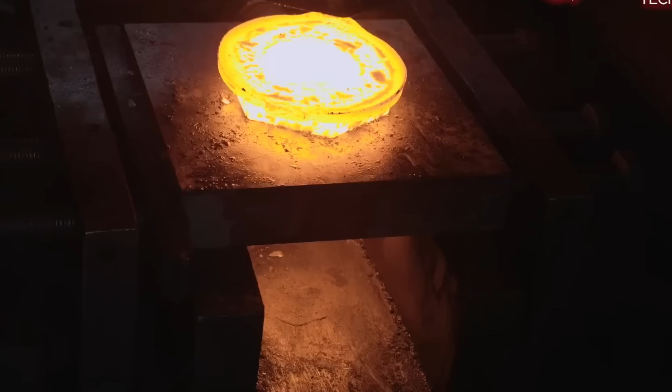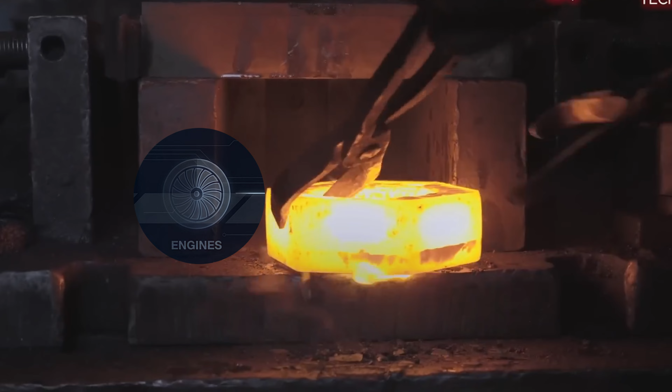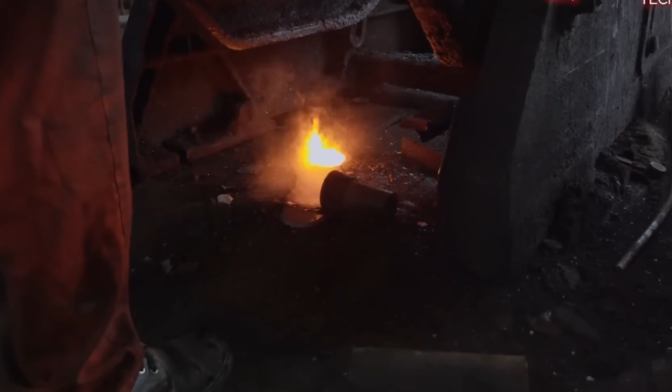Welcome to WarTech Lab. If everything fails, this is what's left. Not engines, not weapons, just steel. A single connection between a ship and the ocean beneath it. Because when a storm hits and control is lost, everything depends on one system that cannot break.

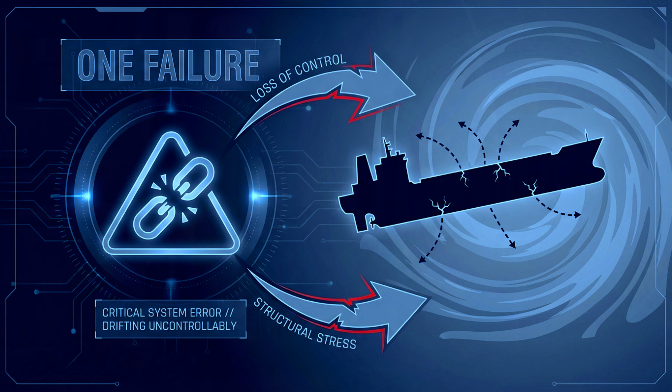These chains don't just hold ships in place. They hold billions of dollars in cargo. They hold entire vessels steady against the force of the sea. They hold lives. And if even one link fails, the consequences aren't gradual. They're immediate. Uncontrolled drift, structural damage, total loss. Because at this scale, failure doesn't give warnings.

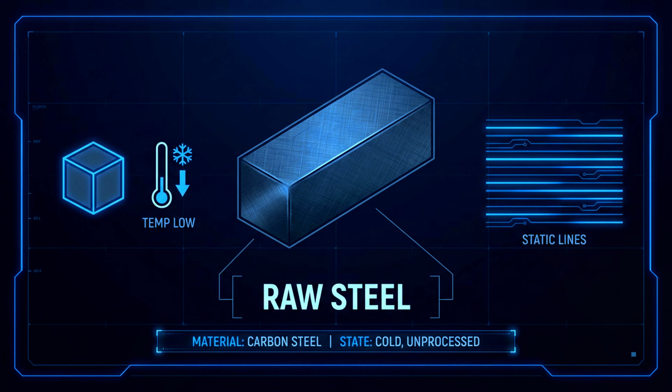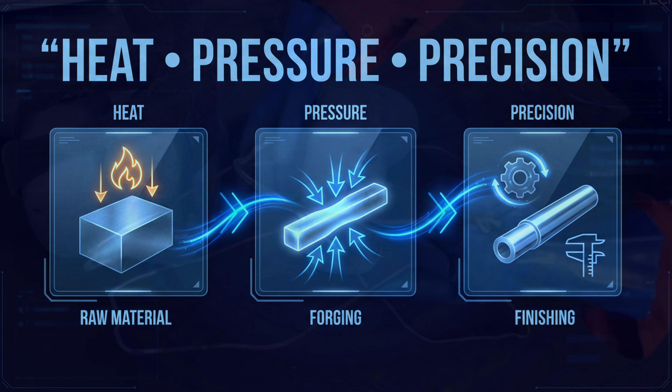But what you're looking at doesn't start as a chain. It begins as a solid steel bar, cold, rigid, and unremarkable, until it enters a process designed to push material to its absolute limits. Heat, pressure, precision. This is where raw steel is transformed into something that must never fail.

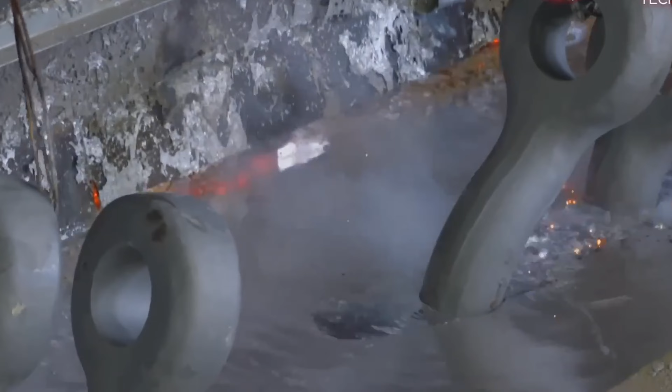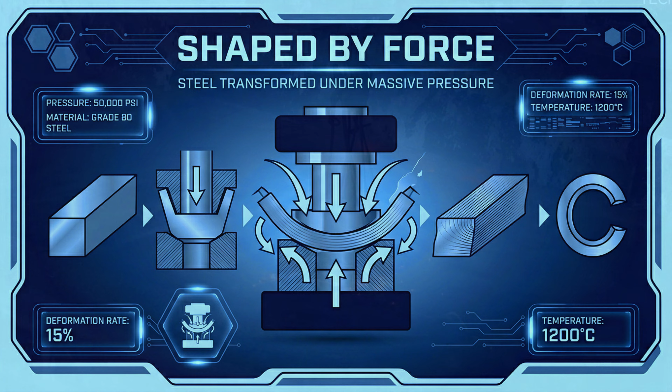Inside massive furnaces, each piece is heated from the core, reaching temperatures high enough to reshape the metal itself. It glows, softens, becomes something else. Then comes force. Hundreds of tons of pressure bend, compress, and form each piece into its first recognizable shape. Not yet a chain, but no longer just steel.

Because a chain isn't defined by its parts, it's defined by how they connect. Each link must be closed, fused into a single continuous structure, not attached, but transformed into one piece, at the molecular level. Because in the end, strength isn't about size. It's about whether that connection can survive when everything else cannot.

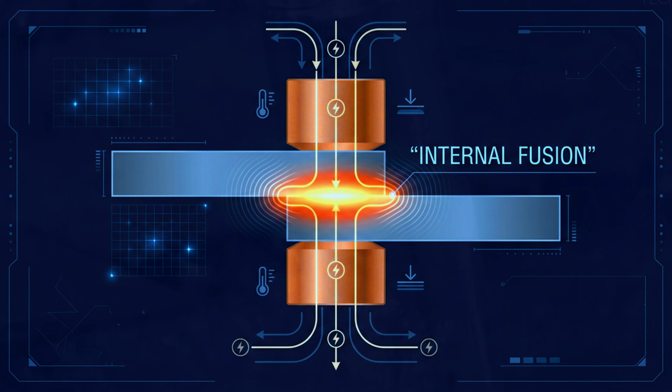At this stage, the link is closed, but it's not yet complete. Because closing the gap is not enough. It has to become one. An intense electric current flows through the joint, generating heat from resistance itself. The metal begins to melt, not from outside pressure, but from within. And in seconds, two separate ends become a single structure. No seam, no weakness, only continuity.

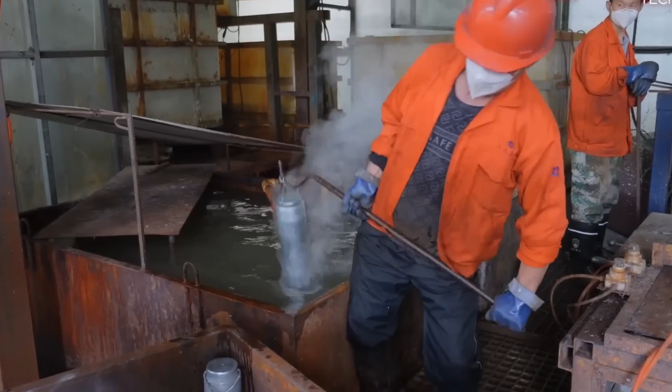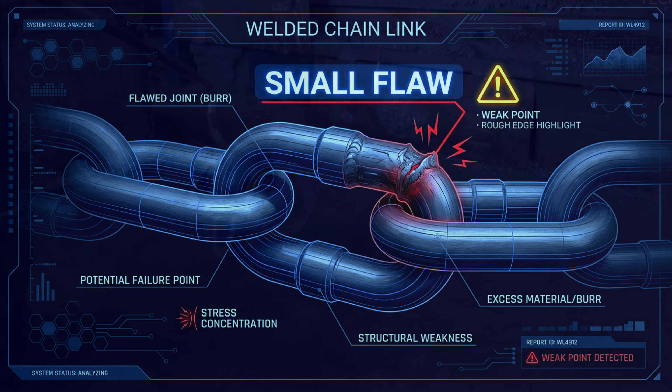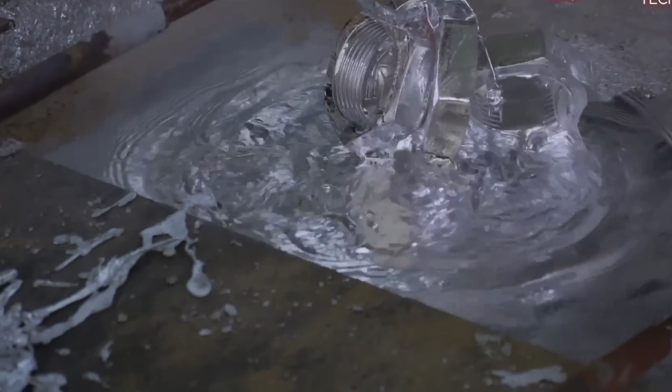But even perfection leaves behind flaws. Excess material forms at the joint, a small imperfection that cannot remain. Because at this scale, even the smallest irregularity can become a failure point. So the link is pressed again, with controlled force, removing everything that doesn't belong. What remains is clean, uniform, precise, ready for something far greater.

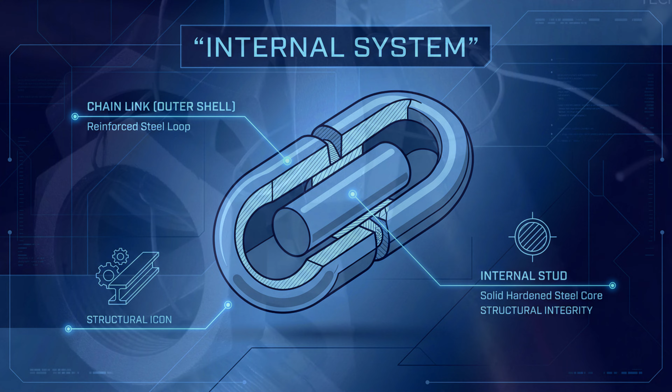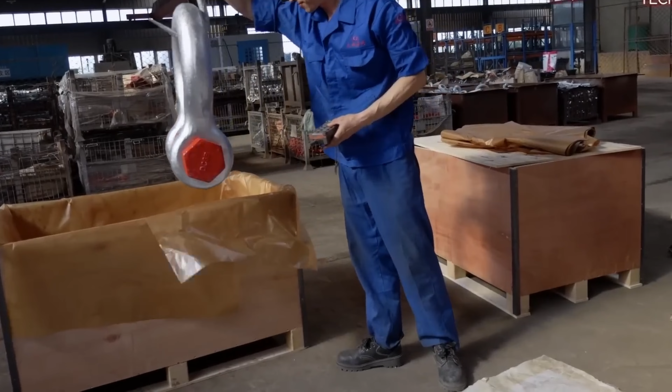But strength isn't just external. Inside every link, there's another system, a solid steel bar placed at the center. This is the stud. It prevents deformation, distributes force, multiplies resistance. Without it, the link could bend under pressure. With it, the entire structure becomes rigid, stronger, more stable, more reliable.

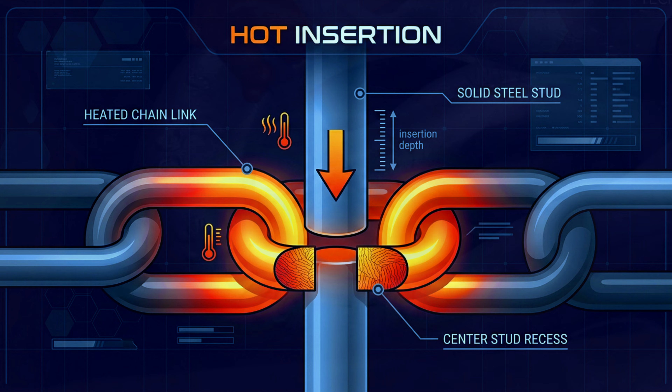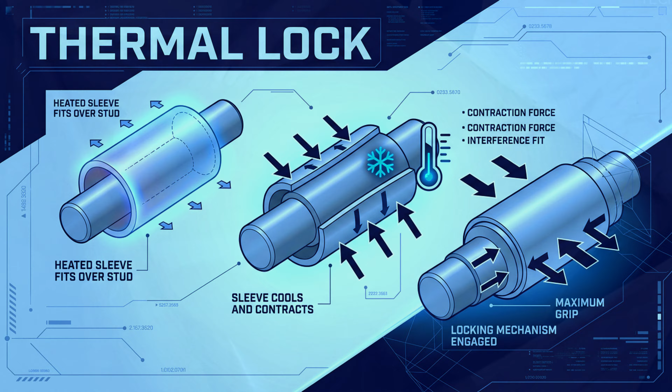Now comes a critical step. The stud is inserted into the still hot link, and then pressure is applied from both sides. As the metal cools, it contracts, trapping the internal core with thousands of tons of force. Not bolted, not fitted, locked in place by physics itself.

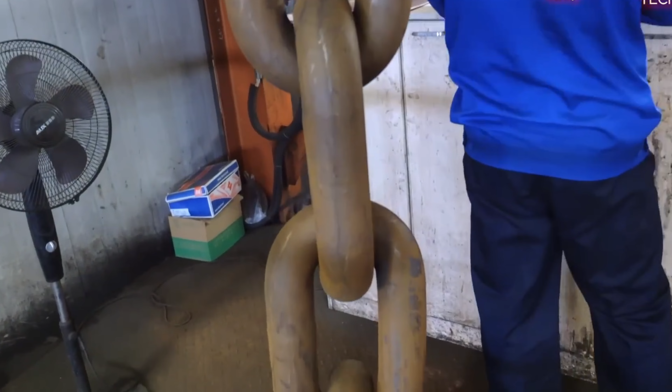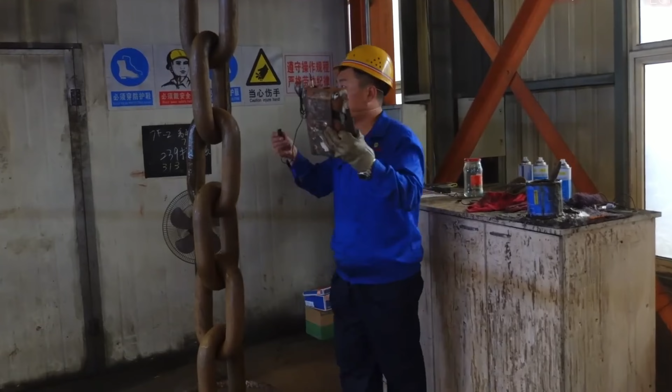But a chain alone is not enough. There has to be a connection to the anchor itself. This is where the shackle comes in, larger, stronger, built to withstand forces even greater than the chain it connects. Because this single component becomes the final link between engineered precision and the unpredictable force of the ocean. And if this fails, everything fails.

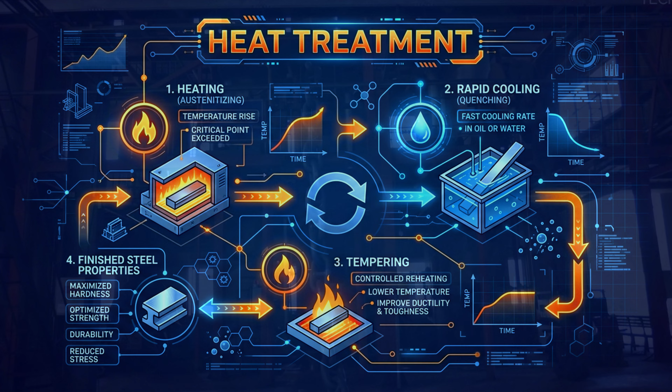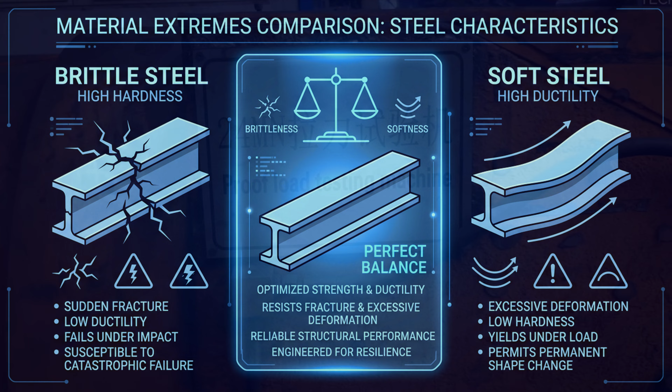At this point, the shape is complete, but strength is still unfinished, because raw steel, even forged, is not ready for the ocean. It has to be transformed from within, heated again, cooled rapidly, then tempered with precision. This process rewrites the internal structure of the metal, balancing hardness with toughness. Too hard, and it cracks. Too soft, and it bends. Here, there is no room for imbalance.

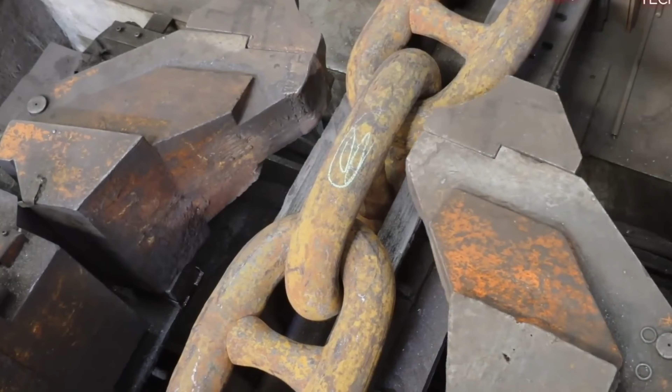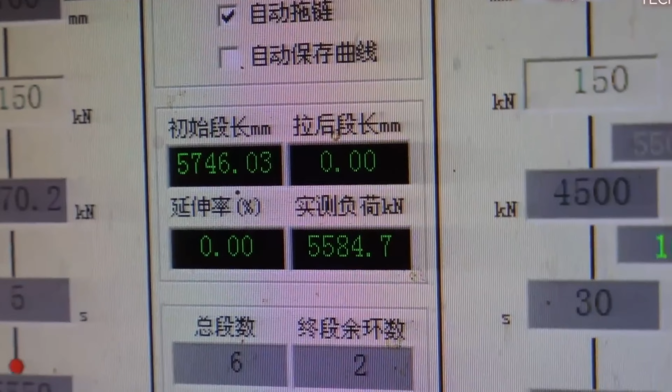Now comes the real question. Will it hold? Each chain is subjected to forces far beyond normal operation. Thousands of tons of tension pull against every link, every weld, every connection. And there are only two outcomes. It holds or it fails. Because out there is no second test.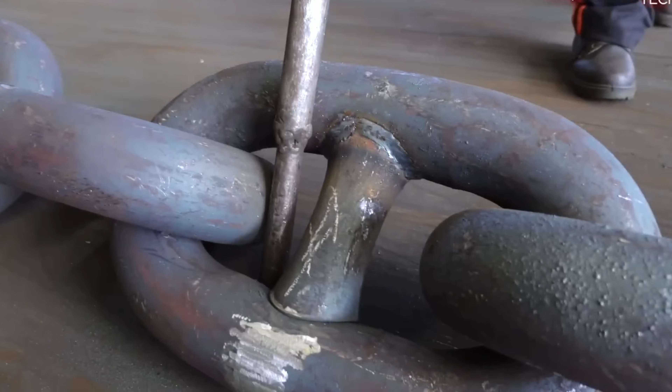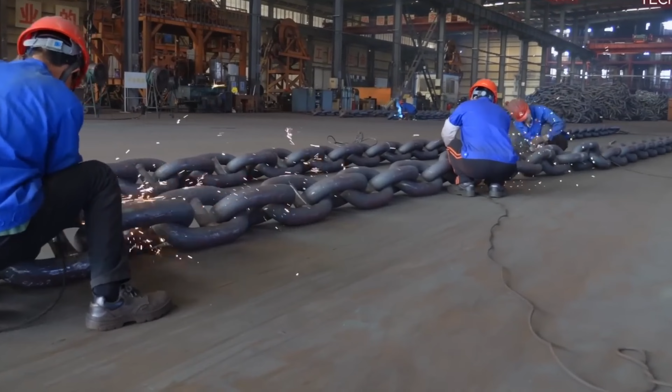Even if it survives the load, the inspection is not over. Invisible cracks, microscopic weaknesses are enough to bring everything down. So every link is scanned. Magnetic fields reveal flaws the human eye cannot see. Nothing is assumed. Nothing is ignored. Because at this scale, certainty is engineered, not trusted.

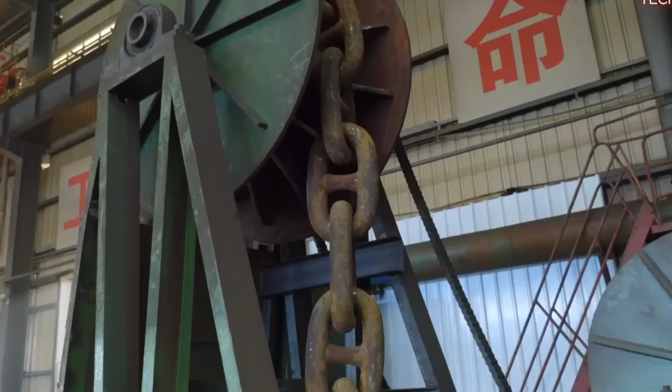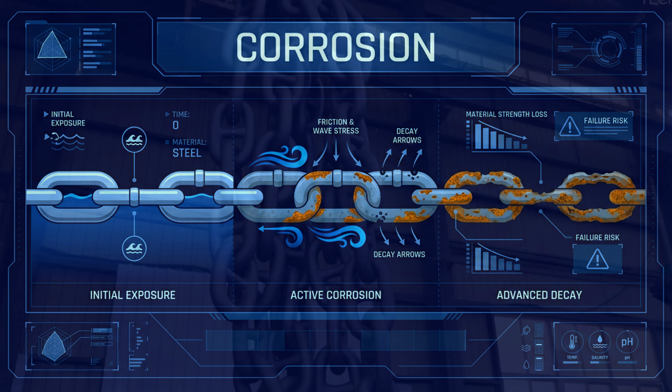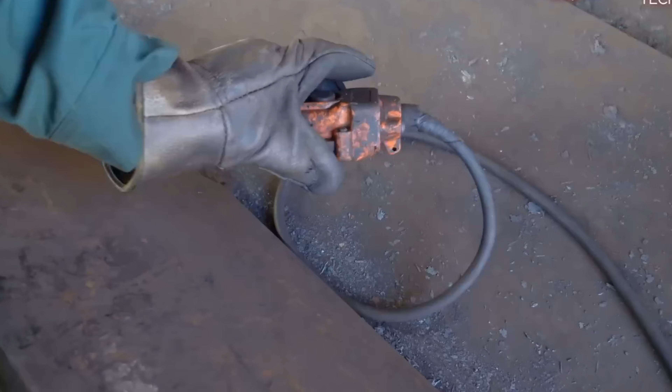But strength alone isn't enough. The ocean doesn't just apply force, it destroys over time. Salt water corrodes. Constant motion wears everything down. So each chain is coated, sealed against the environment, a protective layer that turns years into decades. Because survival isn't just about impact, it's about endurance.

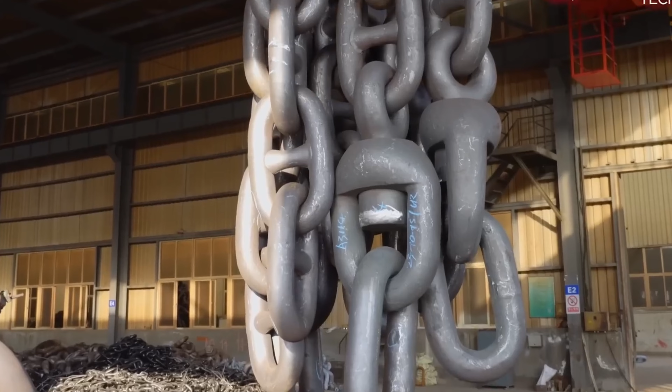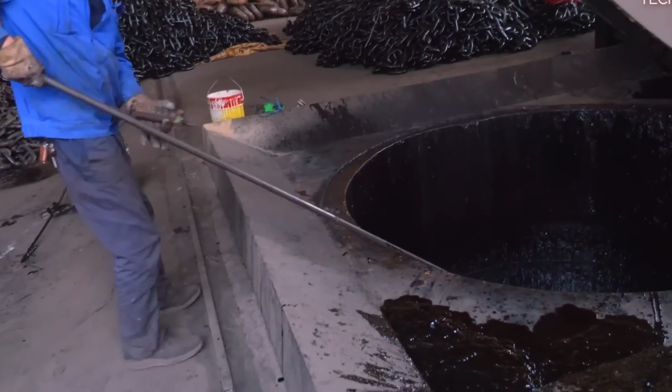In the end, this isn't just a chain. It's a system designed to never fail. Because when a ship meets the storm and everything else is pushed to its limit, this is what remains. One connection, one responsibility, holding everything in place. Because out there, failure doesn't come twice.